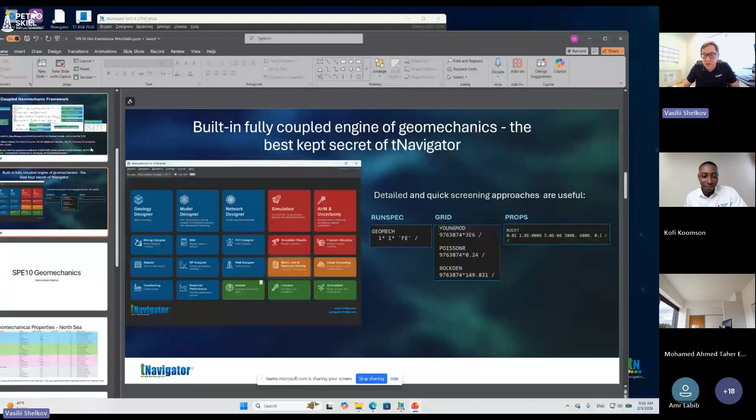Okay, so let me share the screen. Okay. Do you see it? You can see it. Yes, it's okay. It's okay? Okay. All right, so let me. Is it fine?

Yeah, okay. So the name of the presentation is Fully Coupled Geomechanics, the best kept secret of tNavigator. And last year we celebrated 20 years of tNavigator. It's hard to believe. I feel like we started yesterday. I guess you will see the same about the PetroSkills startup. Sooner or later, you will realize it's been more than one month. It could be 10 years, 20 years. So it's a good thing.

In tNavigator, we have different things. So in principle, you can stay within the framework of tNavigator and fulfill different pieces of the workflow of a reservoir engineer, geologist, geoscientist. Some of these pieces are more advanced, some are in the middle of development, but overall it's a fairly powerful tool that allows you to study physics, make predictions, analyze the economics, and do pretty much everything you are supposed to do working for an exploration and production oil company, gas company or service company. So the topic.

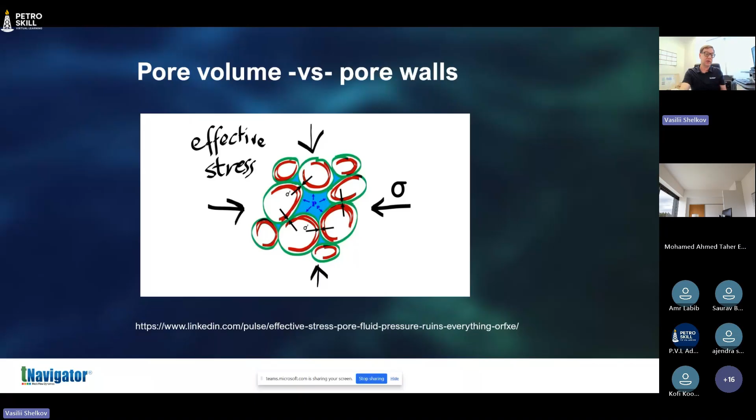So it's very difficult to include. In many cases, you don't need to, right? But as we go to CCS, the carbon storage, carbon, you know, like EOR, where you do fracking, where you inject too much. As you go to more and more complex fields, away from sandboxes, away from bread and butter, kind of easy to get oil, you start to worry about geomechanics.

Because sometimes rocks break, sometimes you actually get things near, for example, a fault, where you can drop pressure too much or inject too much, and you can change the properties of the faults. So you start to worry that maybe I have to actually model what's going on inside the rock walls, not just the pore volume.

So this is like a system of equations. Basically, the first two equations and the fourth one are what you need to know about the flow, right? Flow of liquids and gases, and dissolved gases and liquids. And geomechanics is equation number three. In this case it's elastic. Elastic means it actually behaves like a spring. So you press it, it can go up and down.

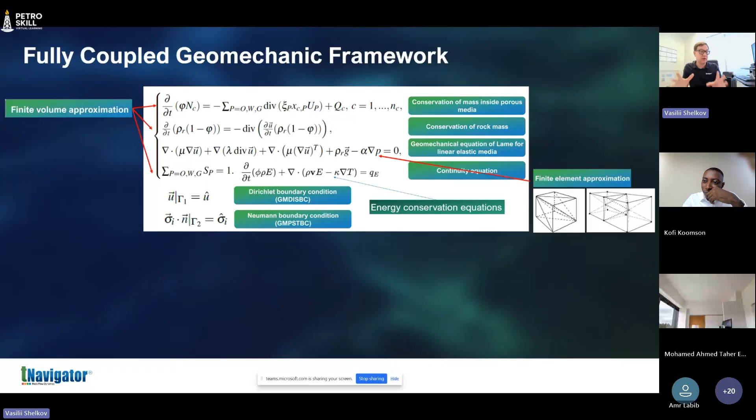So what we did in tNav, we actually put this engine behind the scenes. You can take any model, you can change a few keywords, I'll come to this in the next slide, and you can turn on the fully coupled geomechanics. Fully coupled means that simulation and rock stress calculation, all these equations plus some others, are actually calculated and numerically resolved in one big system.

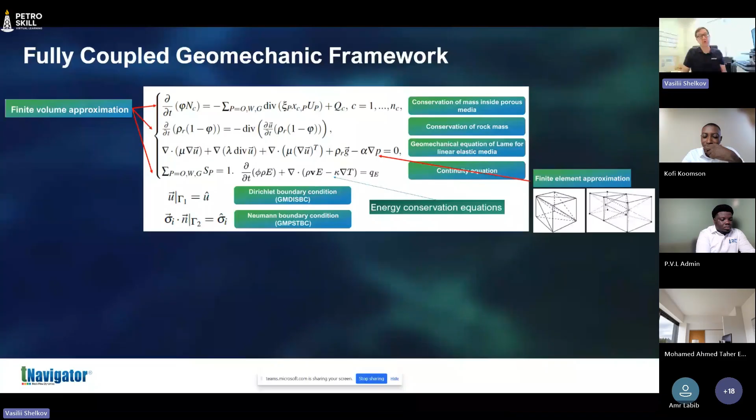Technically, it's very complex because you have to change grids. For simulation, you use finite volume, finite difference for time approximations, and for geomechanics you need a finite element approximation. So you see on the right that you have to actually create tetrahedral grids. We do it automatically for you, so you don't have to worry about this. You have to worry about the boundary conditions. You have to include the thermal effects if you'd like.

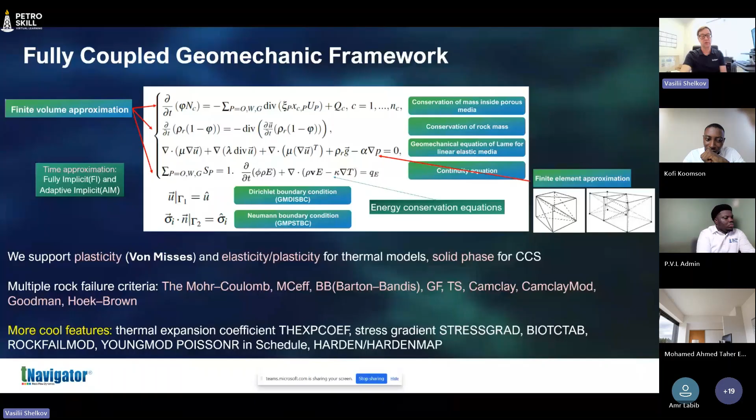There are many details, but the main idea is that tNavigator allows you to do simulation and rock stress physics, geomechanics, in one place and solve it at the same time. So there are two approaches. Why we call it the best kept secret of tNavigator: when you look at the interface, there is no button, there is no icon that says geomechanics. If you go through network designer, surfaces, AHM, fracture designer, seismic mining, PVT designer, there is no name geomechanics, but it's there. You don't see it, but it's there.

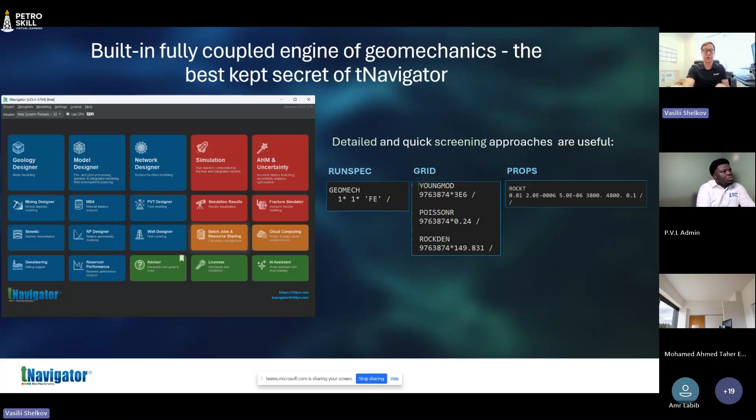So it allows you to take basically two approaches. One approach is very detailed. This is what I'm going to show you, an example of a model which has already been built. And the second approach is a quick screening. You take any model you have, any physics, compositional, thermal, black oil, and you just add three types of keywords. You flag to tNav that you want geomechanics. You specify Young's modulus and Poisson's ratio, and if you want to add thermal properties, you add them, and you push the run button, right?

So what we did, we took the famous, this is work done by our colleague from Canada, University of Calgary, Hamid Reza Hamdi. He took SPE10 and extended it all the way to the surface.

You know, SPE10 is a small piece of the bottom of the North Sea in Europe. And so he built up the overburden, all the layers that don't participate in the filtration or production of oil or gas, but they provide the stress. And so in a detailed approach, you have to specify all the properties. So you can see layer by layer, different properties. On the right, you can see the references where these numbers are coming from.

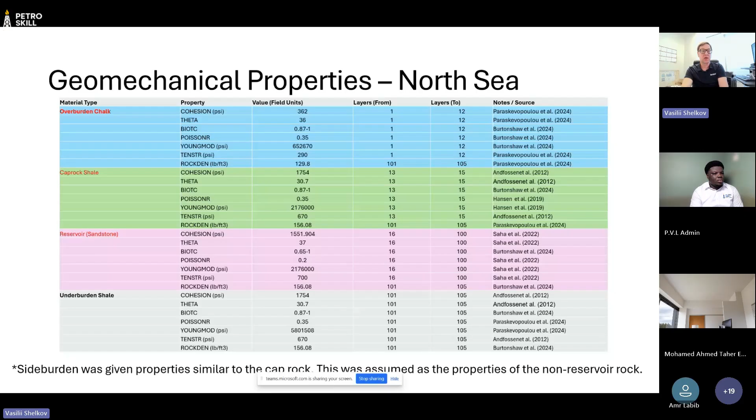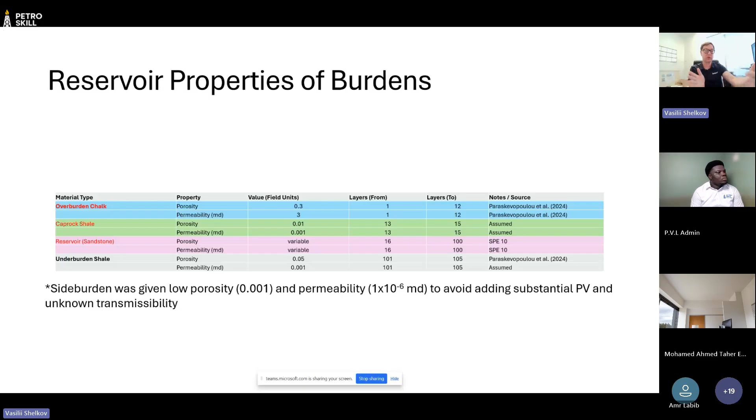You specify basic properties for elastic and non-elastic things. Then you specify boundary conditions, and you specify some sort of dummy properties, filtration properties for the overburden, underburden, just to get it working.

And then, what's inside: in addition to elastic, we had the properties, sort of spring behavior. We simulate shear and tensile failures, but in this period of time, none of them happened. So basically, we didn't destroy the rock. And also we use von Mises, very simple, that doesn't require too much external data to be provided, an elastic, non-elastic model. So it's not a very simple model overall.

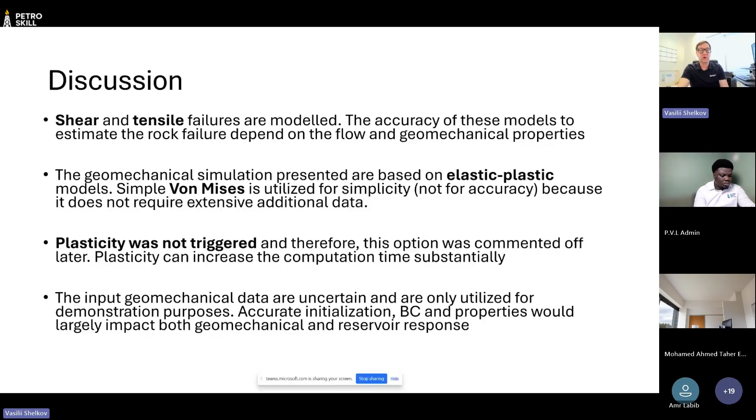And so let me just go ahead and show how it looks live, right? So, okay, this is tNavigator. What I'm going to do, I'm going to point to the model so that I can actually show you what that model looks like. So you can see some settings, and this is the key thing.

It's GeoMech. We basically say we would like to extend this model, which is in one of the industry formats. You can see familiar keywords. And I specify I'd like to turn on geomechanics. And this sends a signal to tNavigator to do many things. First of all, you have to change the grid. We actually generate an additional grid, which is like a shadow grid of tetrahedrals based on the grid that's supplied with your simulation model.

Then we change the interface to accommodate new maps, because you have many more parameters. You're going to see it in a sec. And then you supply these includes. So it's basically the same model you've been running, except you have to add a few other parameters and the signal that you're going to go through geomechanics. That's all. So it's very easy to do.

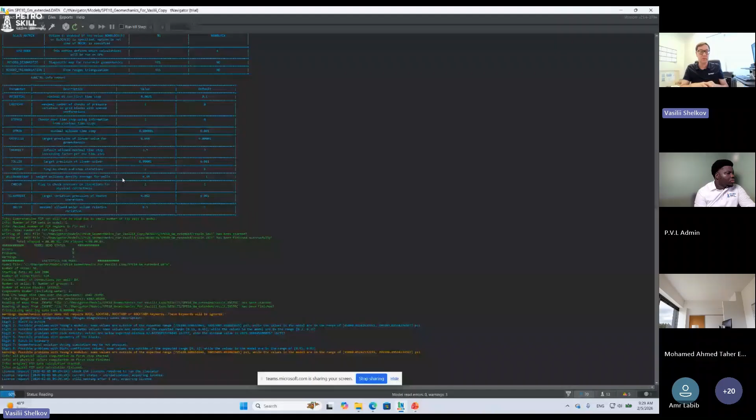So once you run tNavigator fully coupled with the simulation and geomechanics, we usually offload the linear part. So the linear solver is resolved on a GPU, but everything else is done on the CPU. Okay, so this is the model already loaded. What you can see, there is a button. So there is a layer. So basically SPE10 is a little layer you will see soon.

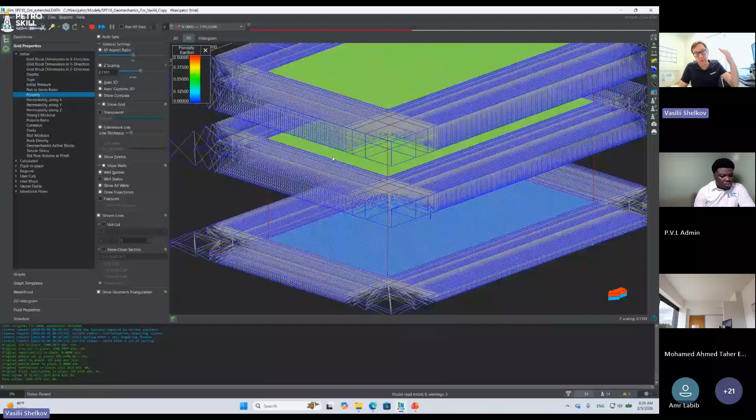On the bottom here, and then there are all these layers which take you to the bottom of the North Sea. And here on the top, you basically assume the boundary condition, pressure from the water and the air above. So we can remove it. So this is the normal grid that we use for simulation. This is the tetrahedral grid that is generated automatically. You see all this additional structure. So the overhead is obvious, right? You have to keep the second grid.

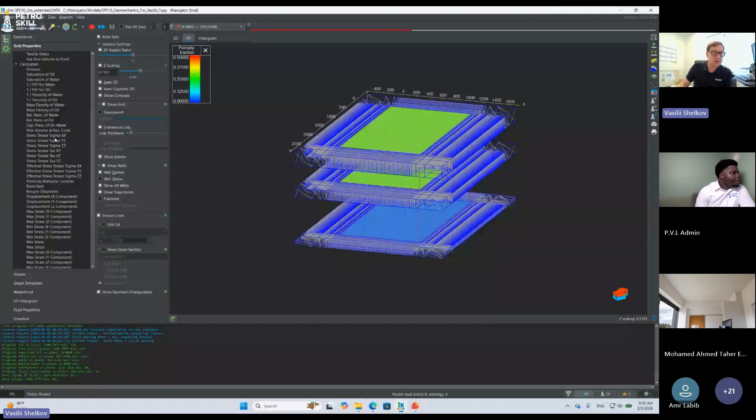So instead of 1 million active grid blocks for the full model, you end up with 1.6 million. So it's like a 1.6 times bigger grid. You need more memory to run it. And then you immediately see the additional parameters. So we go to the interface of tNavigator. In addition to pressure and saturation of oil, you get all these tensors, different parameters of the normal stress, of the shear stress, components, deformations, and so on and so forth.

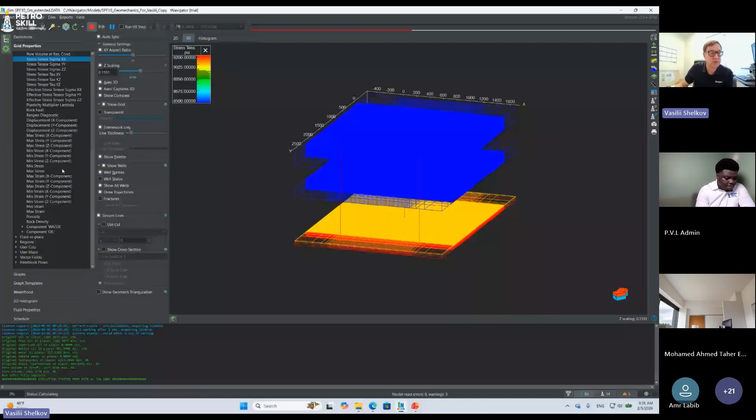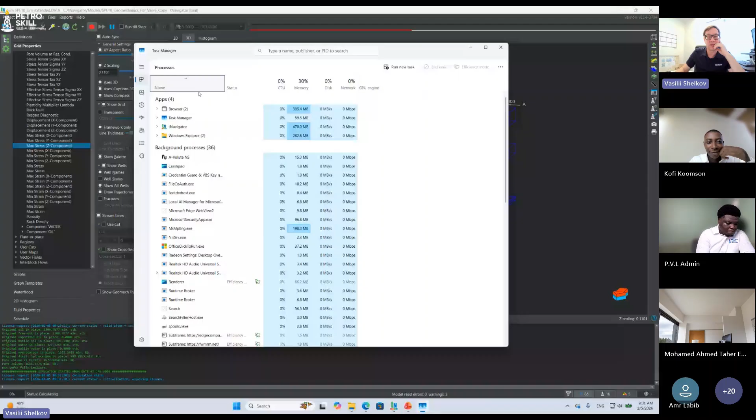So this is automatically added. Okay, so what do I do to run it? I just press the button the same way as you do with any reservoir model that you use tNavigator for. So let me just run one time step, and I'll show you how the resources are used. So you see the CPU is busy. GPU busy, but not much because it's just the linear solver. But still, we take 2 gigabytes of GPU. So it's running. Let's wait for the first time step.

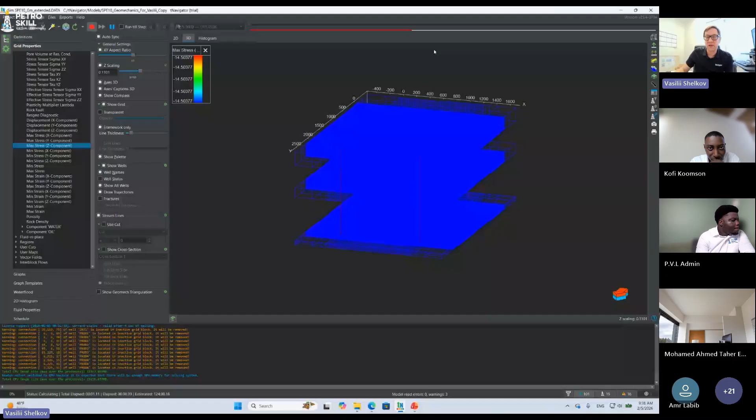It'll probably take a minute or two. Yeah. Okay. So let me stop. So we calculated 12 hours of simulation.

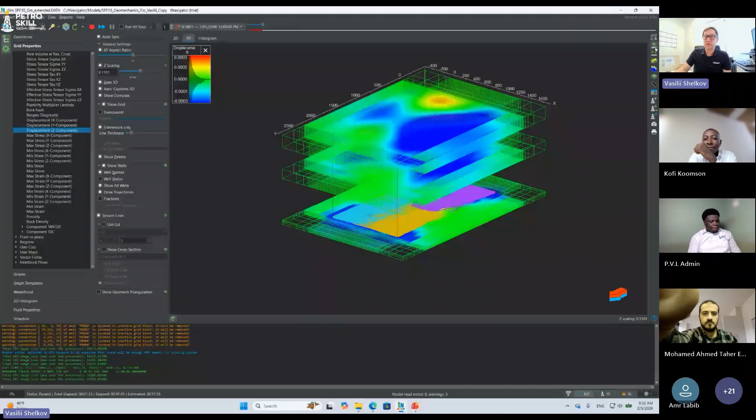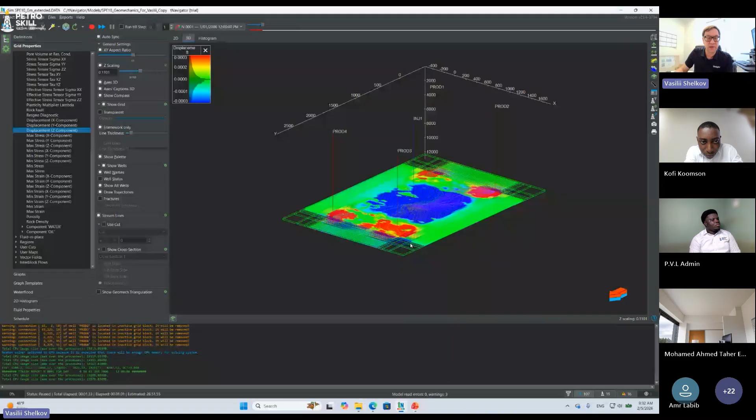So let me go, and just to provide you a better view, let me remove some grid blocks and keep just two, number 18. It's the one on the top, that's a piece of the overburden, and then one on the bottom. So what you can see here, let me zoom in, is the following. So we calculated the first time step.

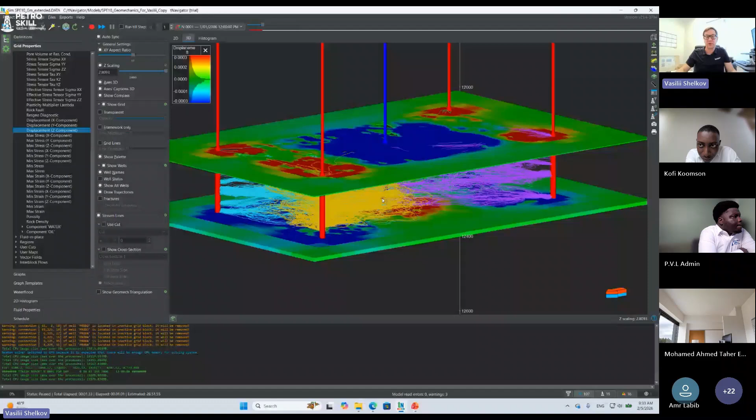So, yeah, okay. You see this is the SPE10 1 million model that not every simulator can calculate. Some simulators take a very long time to do it. If you have a GPU laptop, it takes less than 2 minutes to run the entire model.

So this model is basically squeezed by the top layers, overburden, and the bottom layers and side burdens. So streamlines inside, you see this little cake inside. The different colors mean different wells. Each color is assigned to a specific well, and you can actually see how this is distributed.

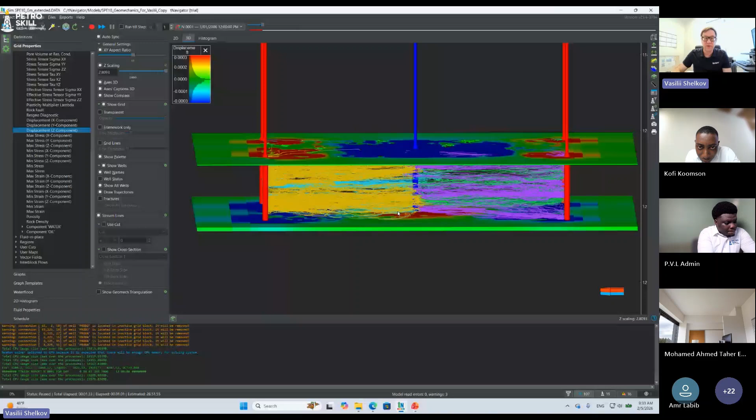So the first thing you can see is the displacement in Z. So we're only pumping water, this injector and four producers. We're pumping water for 12 hours, and you see on the top there is a green distribution, blue distribution. It's blue because it's negative. Z points down. And on the bottom it's a different color. It's red, right? So it's positive.

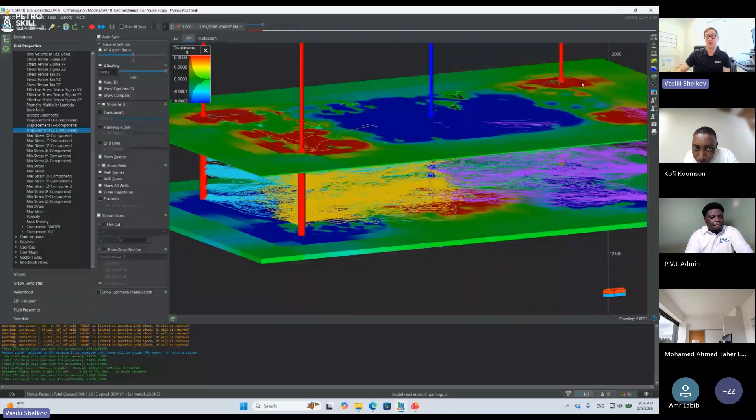So as Z points down, basically what we see is the first effect of the beginning of injection, that you sort of inflate the balloon inside your reservoir. So you're pushing layers up and you're pushing layers down. And when you drop the pressure to produce the oil, you see that the opposite happens around the production wells.

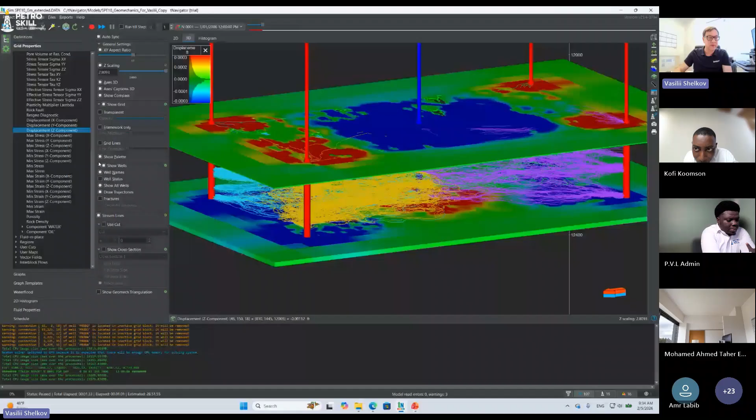So this is the first effect that you immediately see in your model. And you know, if you just run a reservoir simulation without a fully coupled approach, you will never see this distribution. You're totally unaware of what's going on. Now you see. And we can look at different things. For example, effective stress, full displacement vectors, max stress, and so on and so forth.

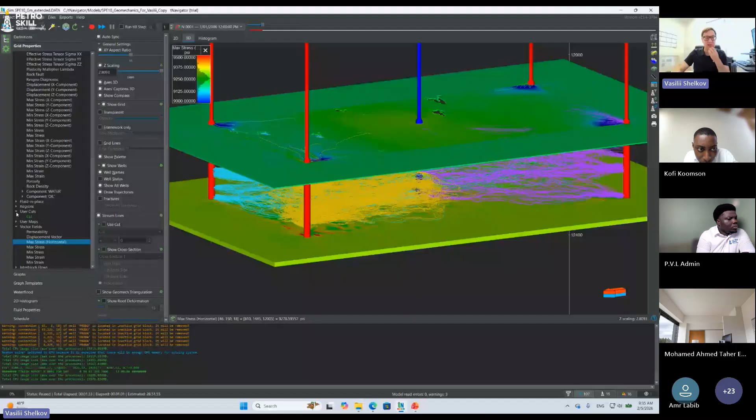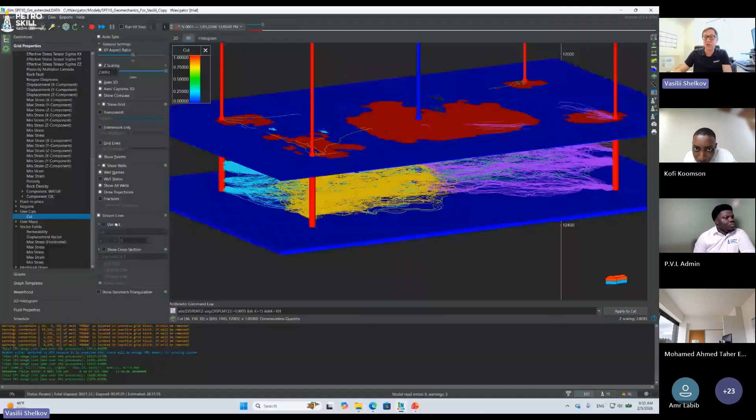Just one more thing. We can use the tNavigator interface and introduce a filter. So in the filter, we basically say, show me only the areas where the displacement in Z, and we are talking about fractions of a millimeter, is large, and keep updating.

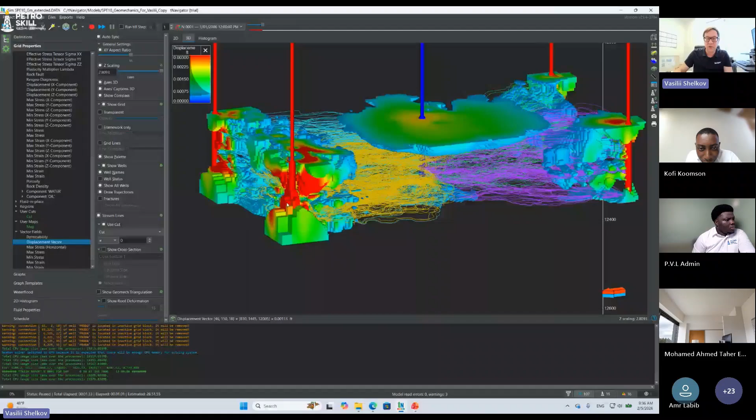So tNav is super interactive, so you do everything in real time, and you cannot do it with other simulators. So we bring all the layers, remove the underburden and overburden, show me the areas where the displacement is the largest, right? And after this, you can look, for example, at the total displacement vector. You see how streamlines are distributed, where most of the action is going on in 3D.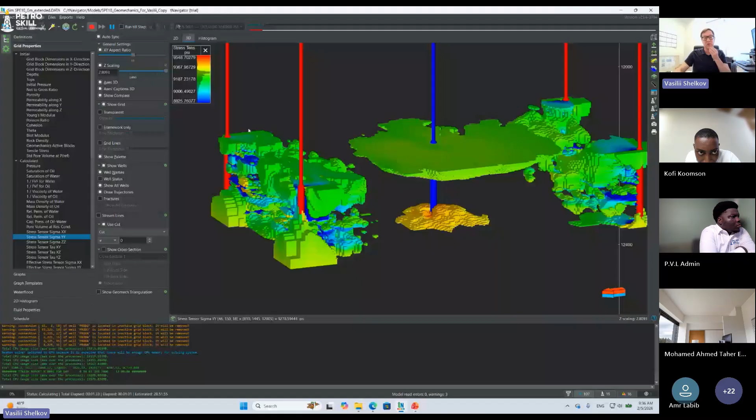All right, and then you can look at the maximum stress. You see lots of stress on the bottom near the injector, and you can look at the different parameters of the stress tensor as well, shear stress, normal stress, and so on. And you just press the button and say keep on going. We didn't have to restart anything or export files, we can do everything interactively. So this is why we call it the best kept secret.

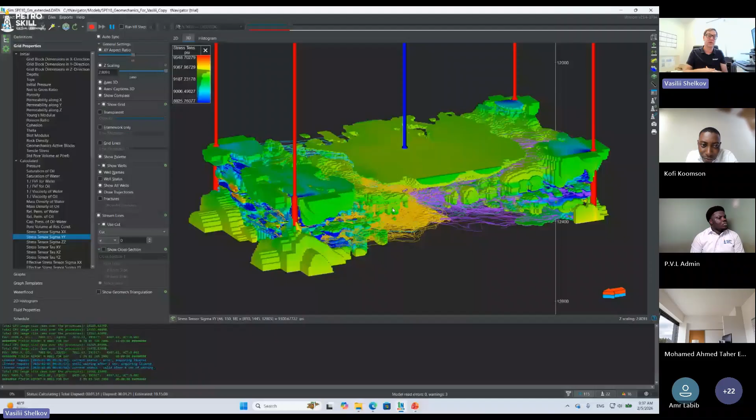And I guess now it's a good time to actually learn how you put together a good reservoir model, how you can do it, and what's available. But this is sort of the ultimate analysis tool for you to combine simulation and geomechanics. I guess that's it. Sorry, I took a little bit more time than I planned.

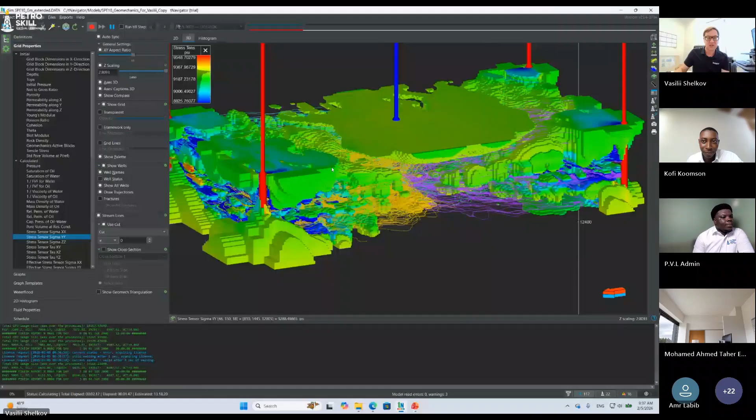Don't worry. Questions, comments? Okay. So please